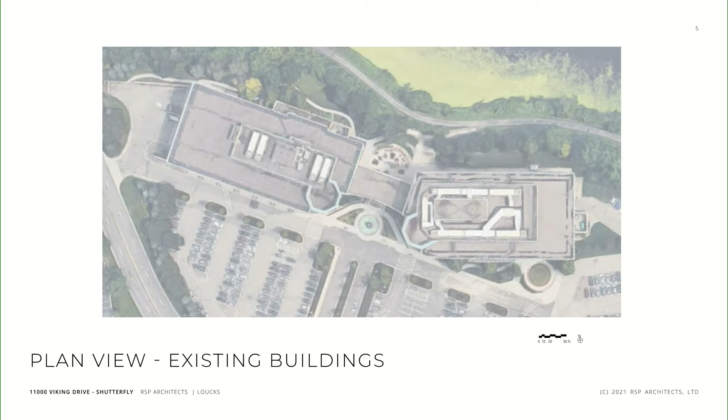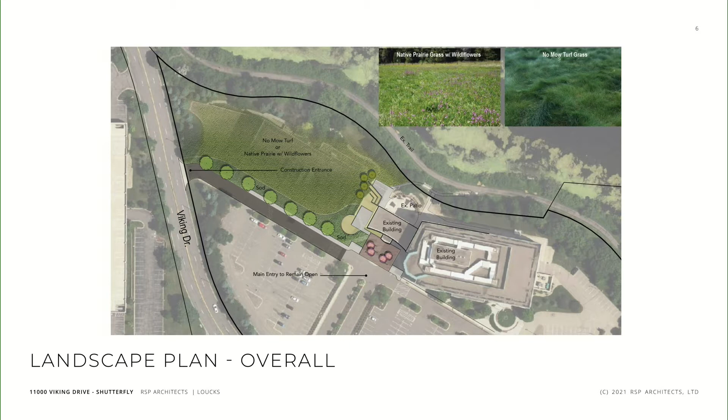This is a plan view of the three existing buildings, the westernmost building, the center lobby connector, and the easternmost building. The new plan would remove that westernmost building, keeping the east taller structure, and then re-emphasizing the lobby connection and drop-off space. When you look at the overall site master plan, this building is central to the entire campus and keeps the pedestrian lengths from vehicle to either door relatively the same.

Here's an enlarged plan of some of the modifications. You'll see we're looking at prairie grasses and natural vegetation, replacing where the building was. There's some temporary drive work that needs to be done as well.

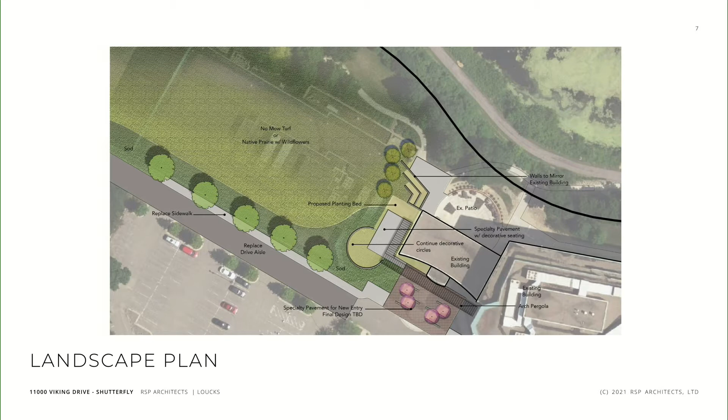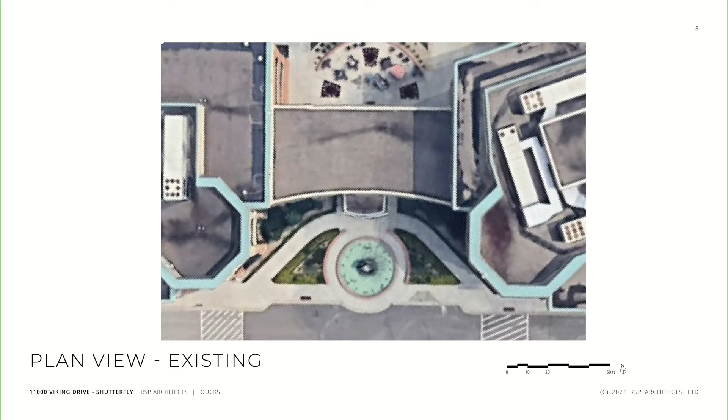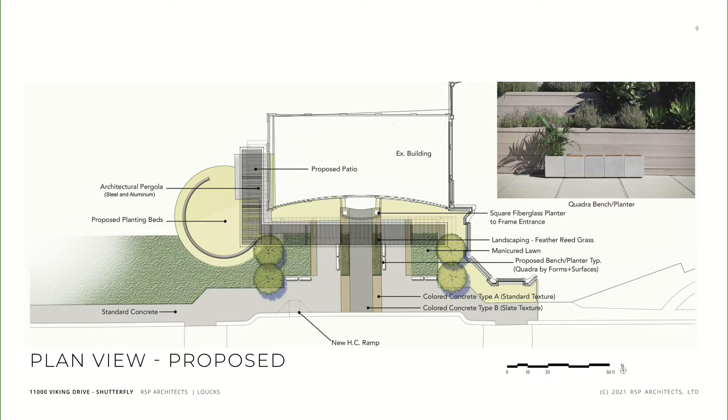This is a view of the existing lobby connection space. You'll see there's a fountain located directly on axis with the entry point. In the new plan, that fountain gets removed. There's a new canopy trellis structure that wraps this lobby element and provides direct access, and we're adding a set of doors and patio out to the western side as a connector to the lawn space.

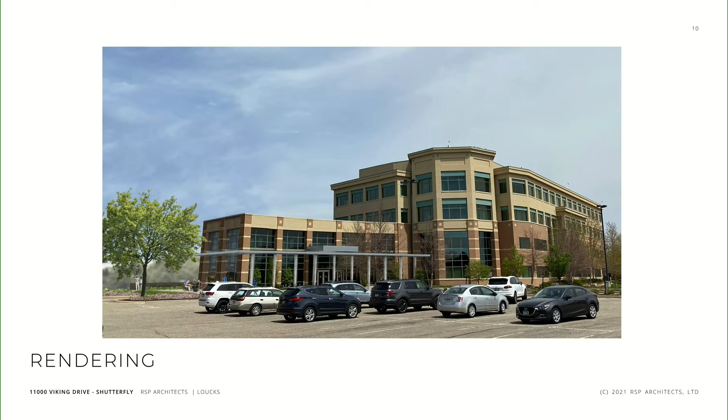Here's a view of the final building. Once the western building is removed, you can see the canopy structure, the existing building, and the current lobby. This is what it looks like today.

One thing to know about the existing building: when the original project was done for Lifetouch, which is now Shutterfly, the lower level was a servery and kitchen space and executive parking, and many of the upper spaces were photography studios and larger offices. With the densification of office space over the last 20 years, that use doesn't really work for Shutterfly anymore, and the building has been, for the most part, abandoned for several years now.

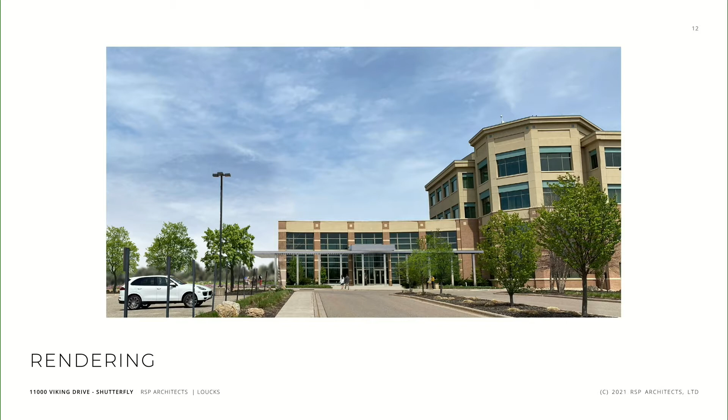Here's that view again once the building is removed and the new canopy structure is added. We're keeping the materials in line with the existing ones: brick, glass, and stucco.

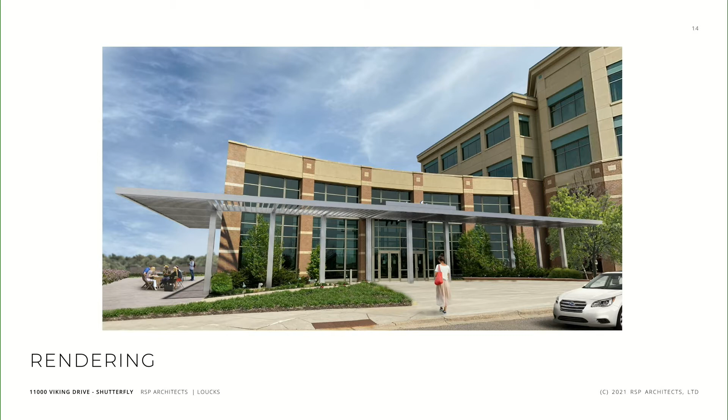Another view of the current lobby entry, and then what it looks like with the revisions and consolidation.

One of the real impetuses for this project is the ability to park the site in a way that works for Shutterfly and any tenant on this campus. There was a report by NAIOP that talks about the need for close to 5 per thousand. City ordinance or zoning requires 4.2 per thousand. With the consolidation and reduction of square footage on site, this takes the current parking ratio from 2.8 to nearly 4.9, above that zoning requirement.

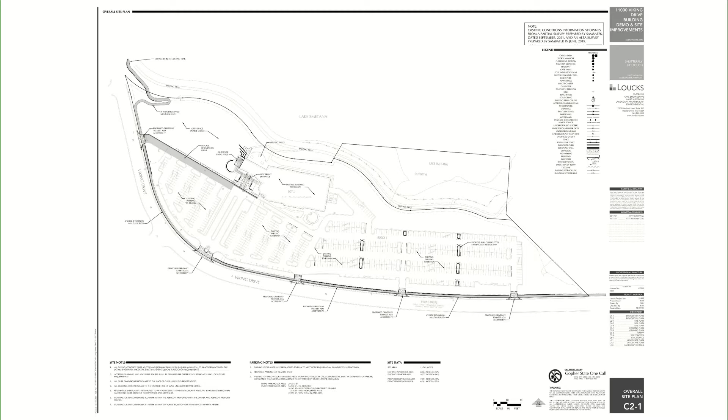Here's a site plan. We actually have some reduction of parking because the executive parking on the west building is removed, and then there's added islands and green space in the easternmost parking lot. We're taking out rock mulch and replacing it with more green, environmentally friendly landscape islands and trees.

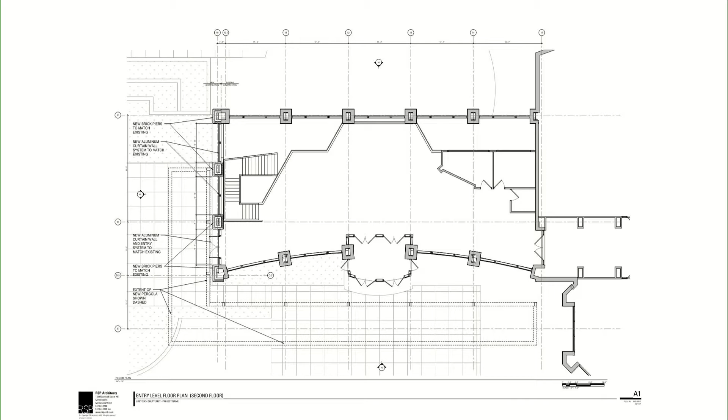Finally, this is the lobby plan. There'll be a new set of doors out to the western side. Really no change to the building except we'll have to reconstruct that western wall where the building was demolished. And finally, this illustrates the three main materials: glass, brick, and stucco.

And with that, I'll turn it over to the city team.

Great, thank you Mr. Highland. Any initial questions for the architect? No? Thank you. Oh, I haven't—

Oh sorry, Commissioner Mitty. How long has Tempest owned the property? Sorry Mr. Highland, we had one question for you. How long has Tempest owned the property for?

And then how long has Shutterfly been in there? I'll let Brad Runsick with the Tempest team come up and answer that, since he understands the real estate aspect. Thank you, Terry. We're under contract to purchase, but we don't own it yet.

Lifetouch, I think, originally developed that as their headquarters back in 1997. I think they've been there ever since. So it's currently owned by Shutterfly. Yeah, okay.

Julie, will we be doing the staff report today? Yes, sir.

To build on the presentation that Mr. Highland shared with you, the request this evening is for a PUD concept review, PUD district review with waivers, and site plan review. There is, as he mentioned, a single waiver being requested as part of the PUD, and that is to address the impervious surface area. Currently, they have a waiver to allow 63% of the site to be impervious.

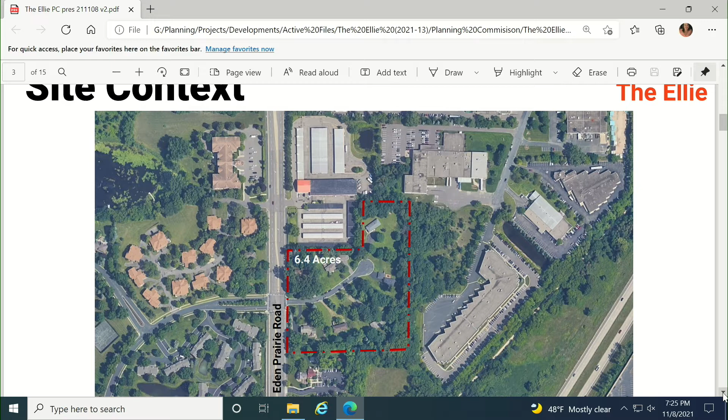Now let Nathan talk about how we came to naming the project. The story behind the name is that it's an homage to the woman credited with naming Eden Prairie. When she traveled out to the west, in her book Summer Rambles in the West, she wrote about the area being called the Garden of the Prairie Land. So for us, the Ellie represents a home within that garden, and it follows our design concept of having the architecture and landscape derived from the existing context of Eden Prairie.

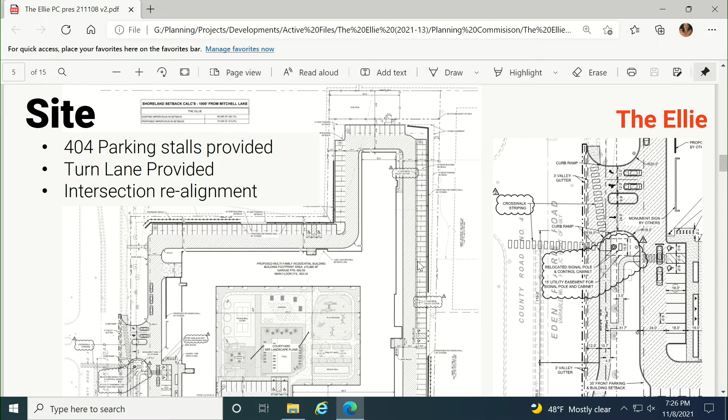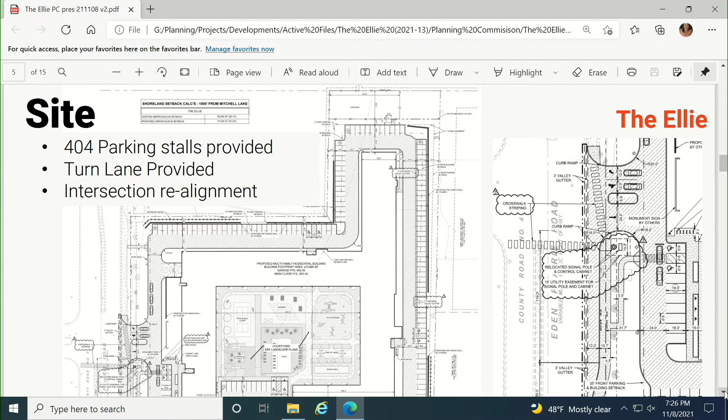So really just wanted to highlight the site itself. In terms of the 404 stalls, you can see the parking wraps around the perimeter of the site. You can see the turn lane, blown up on the right side, from Eden Prairie Road going north, a turn lane into the site to facilitate stacking. We also moved the intersection on the south side down to align with the road across the street.

As you enter the site, the garage opening is to the left. If you look on the west side of the building, you see the cut through in the left image, showing the garage access underneath the building. The front door of the building, with office and amenity space, is on the south side right at the visitor parking area, with the courtyard directly adjacent in the middle of the building.

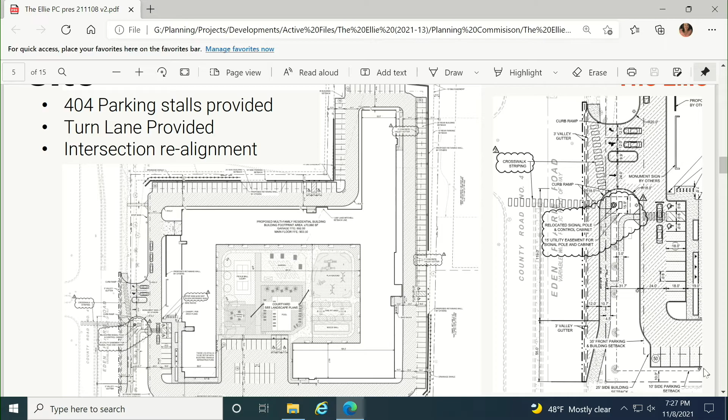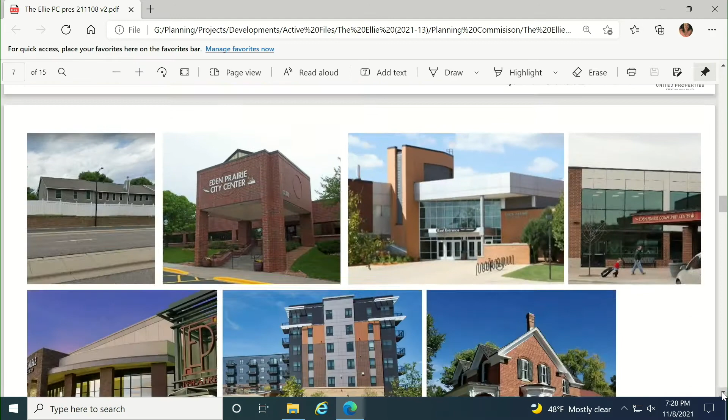I'll let Nathan talk about the architecture. For the exterior palette, what you see is all of the context we pulled from, just a sample of the images. We looked at everything from the retaining walls across the street to some existing public buildings, future projects, recent projects, and even the historic Smith Coffee House adjacent to us, shown in the bottom right corner. Our goal is to complement, pay respect, and blend into this whole palette, taking a snapshot of all the stone bases and how they broke up massing.

In the next page, we'll show you what we chose for ours. Along the base of the building, we chose a Tuscan walnut ledge stone, with a rich hue of reds, browns, and darks. It ties into the historical red brick next door, and into some of the more brown natural colors of Eden Prairie, as well as into that stone base element, the motif you see in the multi-story project.

Above that, we chose 3 different fiber cement panels to accent these volumes. First off, we chose multiple ones because it helps us as one layer of a strategy to break up these volumes more. So each of these pitched roof volumes has a different fiber cement panel.

Another reason why we chose this specific fiber cement is each one has a little texture when you get up close. Because we have balconies and people will be next to these, there is that tactile quality. They don't just look like plastic generic panels. They have some character to them, which is important for a home.

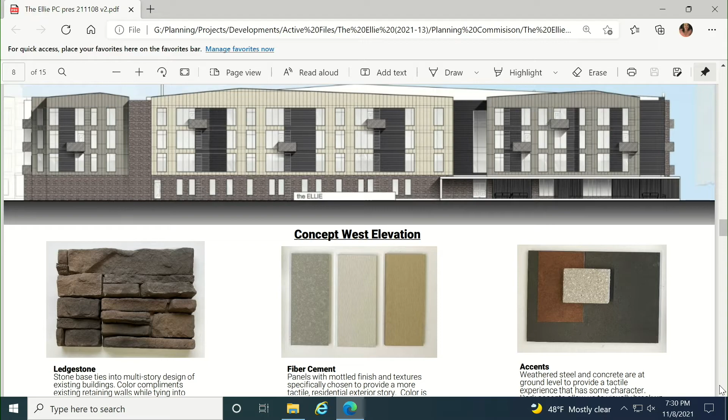And then just some additional images of the building itself, and then you can kind of see those elements that Nathan was talking about in terms of materiality or coloration of them.

The other important feature is the green roof itself, and again, to help reduce the amount of impervious space within the campus itself, we chose to put those on the third floor, which is a reduction of units itself, but the nice thing about that is it really allows the tenants to actually see and witness the green roof itself.

And so in some ways, this becomes a learning lab. So not only do we have a green roof and how a green roof works, but also we have the courtyard space with the capture rainwater for watering gardens. It's really trying to use these sustainability moves as a way to help educate and share with those that live here what green design, sustainable design is all about and the opportunities there for it.

The remainder of the roof is being retained for a future PV array, as possible, as feasible. And you begin to see how really the site itself lays out with our plantings in terms of the bushes and shrubs and trees, really trying to get as much green space back into the campus, yet maintain a dense housing development so we can provide that affordable component.

And that is the overall summary. Those we can talk about later if needed.

Great. Thank you. Initial questions for Mr. Johnson or Mr. Kane?

Commissioner Reddy: What level of apartments are you going for here in terms of what kind of building is your competitive set? I know we've had some other newer Eden Prairie developments, but I'm curious what you see as comparable that you're going to be competing with, and what rental rates are you planning to charge here? Yeah, I'll let Scott answer that one.

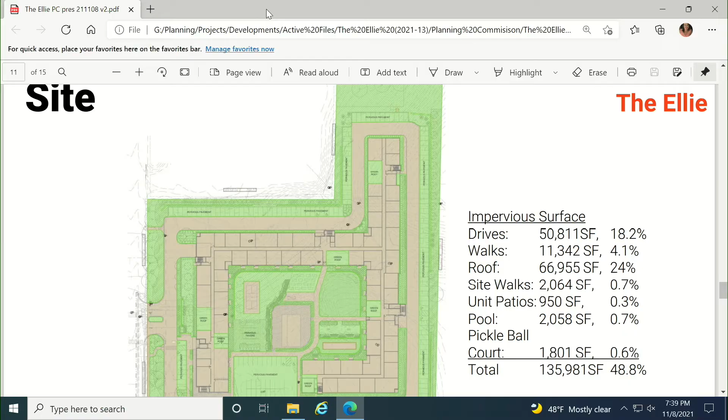So one of my questions was around the green roof, and it sounds like that's not going to be accessible to the residents. Because my other question was going to be, if it is, whoever's going to go out and do landscape there on the green roof, how high would the ledges or the edges of the roof be to prevent someone from falling off and so on? Yeah, so it's not an occupiable roof.

And so the maintenance is very minimal at best. We haven't really talked about how we access that roof for maintenance, but you could get to it from a lift on the outside of the building. Again, the idea is for it to be a visual relief versus an occupiable green space. Okay. And so the whole idea is if it was up on the fourth floor, nobody gets to appreciate the qualities of a green roof. And so this allows us to bring it down as a visual element for the residents.

Again, it's a teaching garden as well in terms of what this green roof landscape could be. And it even allows the residents to come together, and if they want to modify it, change the plantings, they could do something like that over time. Again, it's intended to be a community type project as well.

Okay. My second question is, there was something in the documents that mentioned some fuel tanks needed to be removed. Are those underground fuel tanks? Yeah, so some of the existing single-family homes have these fuel tanks. So part of our reclamation of the site is to remove all that out of there and prepare it for our building. We don't want that there either. Right. But it's the reality of that site and the age of those homes. Okay.

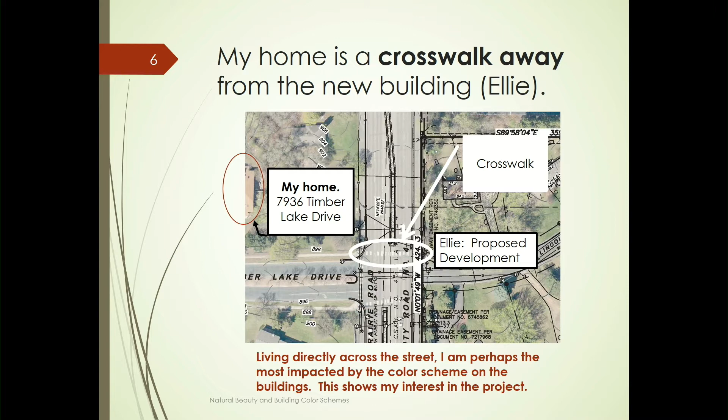So I'll skip over that part. Now, where is my house? My house is a crosswalk away from this project. So if you look here, my home is circled there on the left. There's the proposed development on the right, and you can see I've circled the crosswalk there. So I have a very, very tight interest in this project.

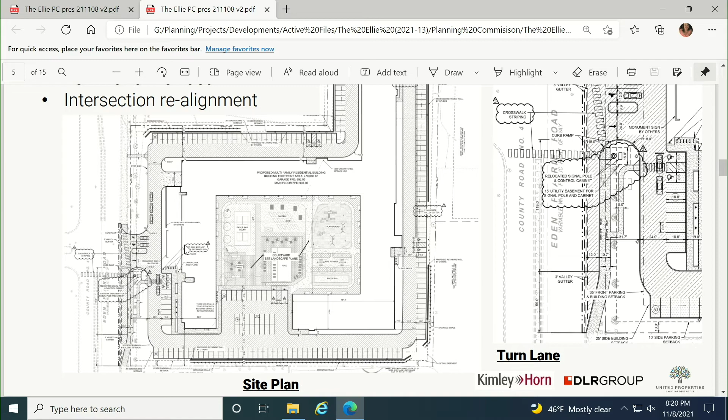So I don't know if a traffic study has been done regarding existing traffic, not what their additional burden would be, but what's present at that intersection. And there is not an added lane for turning right or left. You know, you come to the stoplight and you're stuck, 2 lanes. And even if you go left towards the main intersection of Highway 5 and 4, you have 2 more lights. So the burden gets added to that.

My other significant concern is that since we're looking at apartments where there are likely to be children, is school bus stop. So that delays everything again twice a day, and for safety issues, because that is kind of a busy road.

Next, I'm concerned about the light, not just the light from the vehicles, which I've heard several people talk about shining out. They're going to be directly in our eyes as we approach the intersection, plus they shine into our neighborhood. But as concerning to me are the 20-foot light poles. Even if they shine down, you can't tell me that with that much exterior parking, we're not going to have a significant increase in light pollution in that area, and really a big change.